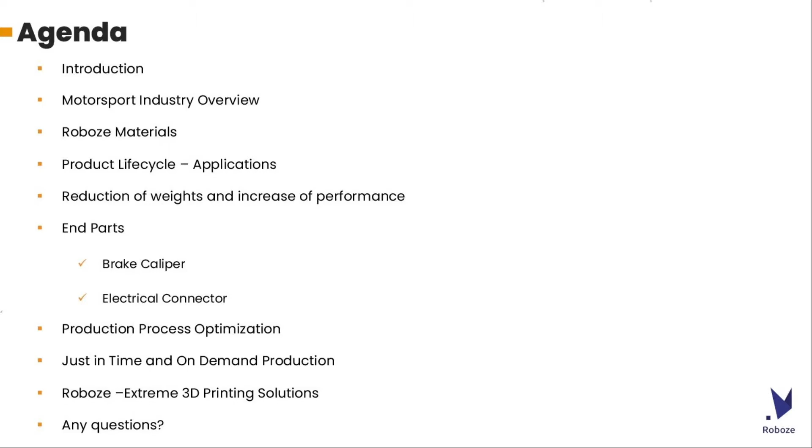Here is Davide, and the main topic is 3D printing for the motorsport industry. After a brief introduction, we will take a look at the most interesting superpolymers and composite materials for the motorsport sector, checking out the advantages that have been already offered by Roboze 3D printing solutions in some real applications.

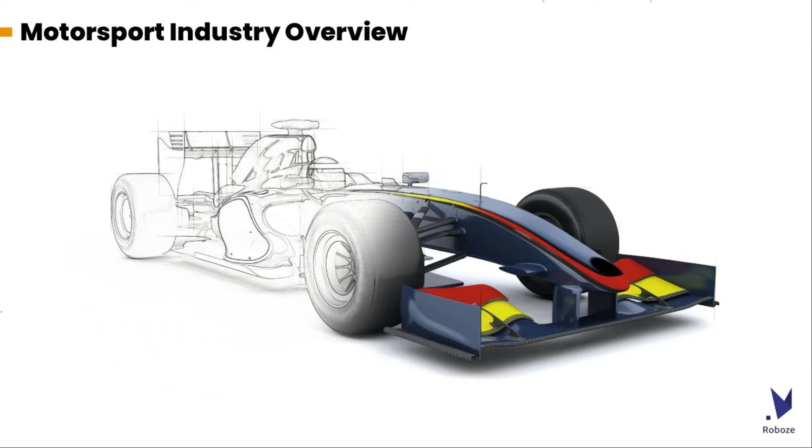And this search for innovation has brought motorsport closer to the latest additive manufacturing technologies, which are able to provide new solutions to the main challenges faced by this industry. How? First of all, design freedom. While traditional manufacturing techniques remove material from a solid block, 3D printing involves the deposition of material layer by layer until the final part is obtained.

This process enables an incredible design freedom, resulting in printed parts with extremely complex shapes or internal infills that may vary in pattern and density. This means that the material can be placed only where it is needed, creating lightweight and strong models that may push the topology optimization concept beyond any boundary.

For sure, in such an industry where solid assemblies and aerodynamic studies have a key role, mechanics requires a surgical precision, whether it is for production or research purposes. And for this reason, additive manufacturing must go through the control of the whole printing process in order to ensure the accuracy and repeatability needed for rapid validation of motorsport parts.

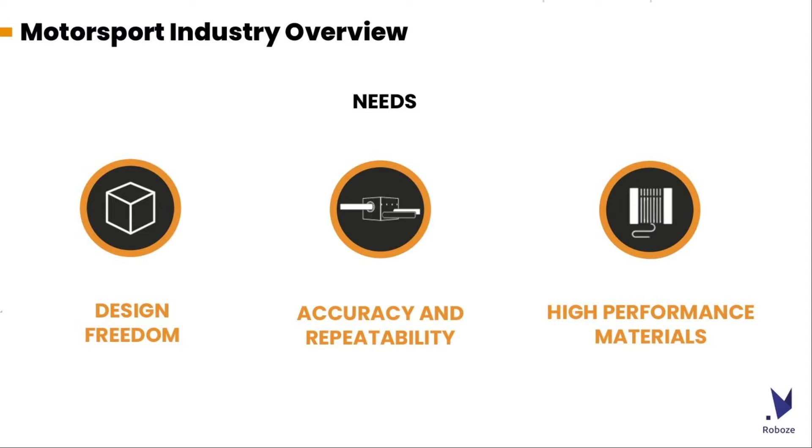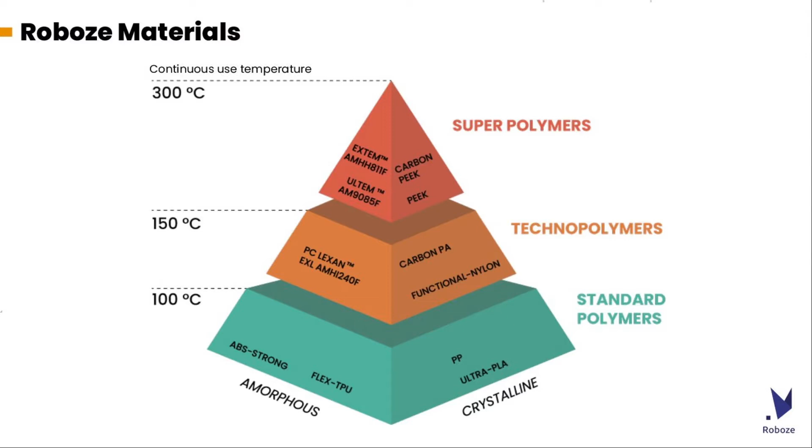Roboze carbon PA is a composite material based on a polyamide 6 matrix reinforced with carbon fiber at 20% in weight. The reinforcement enhances the main properties of nylon, such as resistance to abrasion and wear, providing it with greater thermal and mechanical resistances. For this reason, the filament can work up to 180 degrees Celsius, while from the mechanical point of view, it shows a tensile strength of almost 140 megapascal and an elastic modulus of 15 gigapascal, which is much higher than most other composites available for FFF 3D printing solutions.

The good surface finish, the excellent strength-to-weight ratio, and the possibility of post-machining make carbon PA one of the most used materials in the motorsport sector for the production of finished parts, such as levers and pedals, chain stabilizers, and air deflectors.

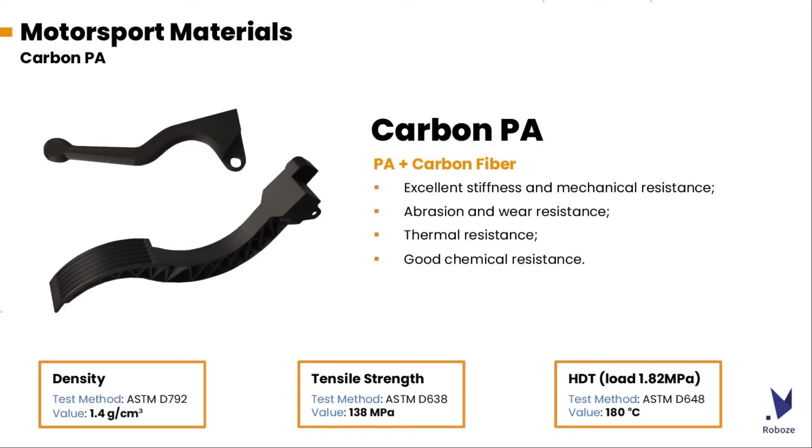PEEK is a semi-crystalline polymer capable of combining good mechanical properties with excellent chemical and wear resistances over an extremely wide temperature range. It has been certified as a self-extinguishing and flame smoke toxicity compliant material, which is often required for racing. PEEK's molecular nature allows it to maintain creep, fatigue, and wear resistances even at temperatures that are close to 250 degrees Celsius, making it optimal for those applications that require reciprocal sliding parts.

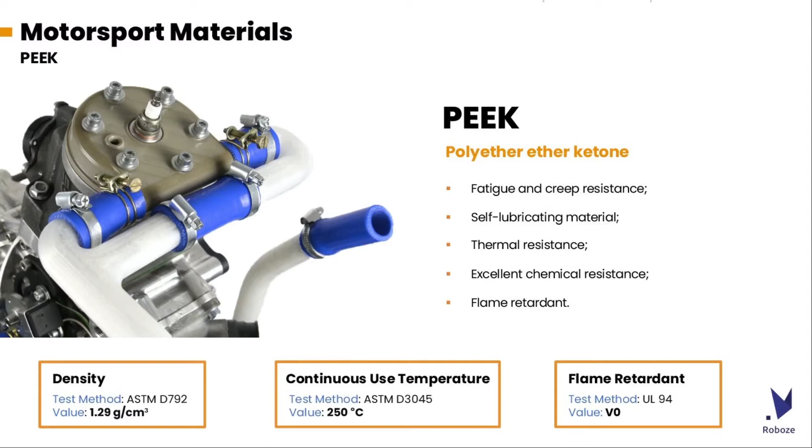By the same token, most acids, bases, and organic solvents do not affect this superpolymer at all at high temperatures. So the ability to work in chemically and thermally aggressive environments, along with the good dielectric and insulating properties, make the motorsport industry use PEEK for the production of electrical connectors and elements which are in contact with oil and gasoline, such as the head or crankshaft covers.

As for nylon, the addition of 10% in weight of carbon fiber reinforcement into a PEEK matrix increases its mechanical and thermal properties, enabling metal replacement in some of the most extreme applications. So, chemical and tribological characteristics are quite the same as the unfilled polymer, but the elastic modulus and the heat deflection temperature are respectively boosted up to 14 gigapascal and 280 degrees Celsius, with better dimensional stability and an amazingly low coefficient of linear thermal expansion.

For these reasons, carbon PEEK provides an optimal solution for the motorsport sector, which takes advantage of the high strength-to-weight ratio to produce seals, tools, and finished parts such as heat shields, intercooler inlets, or shafts and hubs.

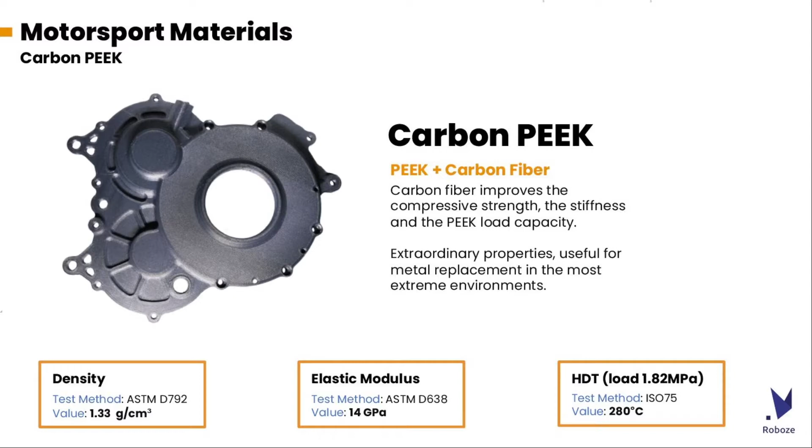Now, people working in motorsport know that the workload rarely drops to quiet routine levels. To provide a rapid response to the different needs of this industry, additive manufacturing technology can be integrated into the entire product life cycle, from design to support, in order to reduce related times and costs.

As previously stated, from a design point of view, 3D printing may play a key role by enabling the production of geometrically complex models, reducing the need for assemblies, and integrating new functionalities within the parts. Moreover, when multiple design-production-test iterations are required, the 3D printing of superpolymers and composites can accelerate both the prototyping and production phases.

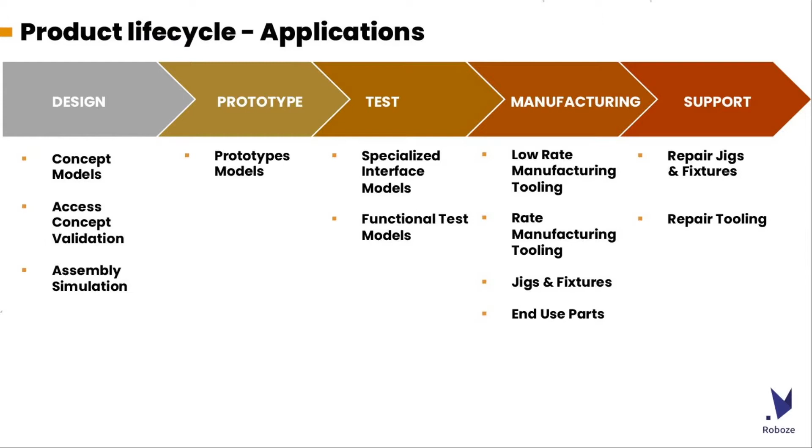In the same way, additive manufacturing can be used for the realization of tools, jigs, and fixtures for assembly and quality control of traditionally manufactured parts, promoting the digitization of the warehouse or standardizing and speeding up the production process.

Now, let's see some real applications, starting from a very simple but important concept. A racing car is a system that always runs close to its limits. And for this reason, weight plays a key role, as it is able to influence every single area and every single sector of the car, from performance to road handling, from the vehicle setup to its safety. For example, a heavier car will necessarily have longer braking distances, worse handling, a more critical acceleration phase coming out of a curve, and so on.

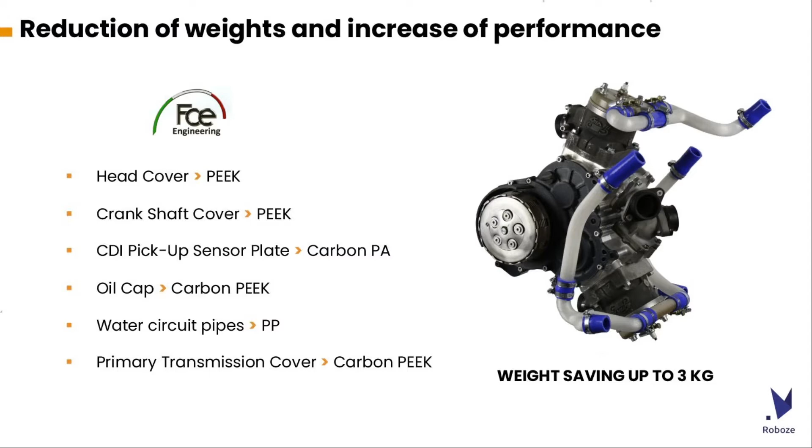As said before, when you match the design freedom provided by 3D printing with superpolymers and composite materials, you can obtain lightweight and resistant parts, which are able to greatly reduce the overall weight of the vehicle while keeping it safe. With particular attention to the design phase, FCE Engineering has taken advantage of the metal replacement opportunity offered by Roboze, reducing the weight of a perfectly operative 250 GP engine by about 3 kilograms with respect to the original design that was mainly made out of metal.

Different application, same goal. Here we have a study from the ITS Maker Institute of Fornovo, where the structure of a high-performance automotive brake caliper has been completely redesigned to be made in carbon PEEK using Roboze FFF 3D printing solutions. The braking system slows the vehicle down by converting movement into heat. This is done by applying pressure to the rear side of the pistons, which push the brake pads against the rotor disc. And the part that is mainly involved in supporting the clamping force is the caliper body, which has to be light, stiff, and must withstand operating temperatures ranging from 150 to 200 degrees.

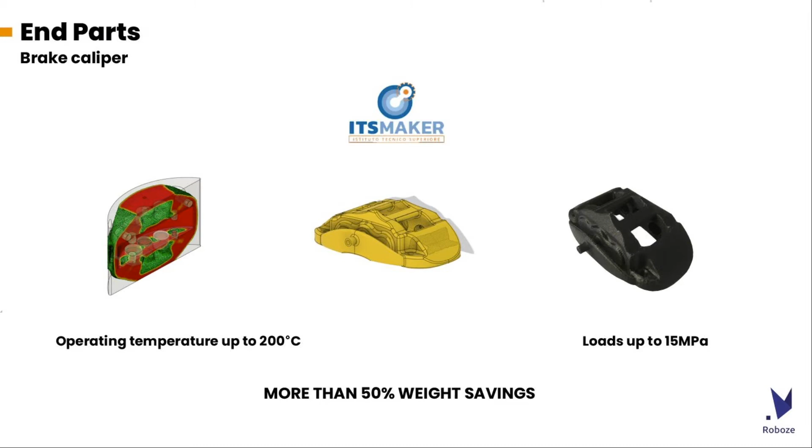The caliper body is usually made of die-cast aluminum, and its CNC machining can last more than 10 hours for a final weight that is generally between 5 and 7 kilograms. By applying some topology optimization and design for additive manufacturing concepts, along with thermomechanical simulations for sure, the caliper body has been printed in one single step with a total weight lower than 2 kilograms. So if you're interested in this study, the printed part will be tested soon, so stay tuned.

Then we can jump to a PEEK electrical connector we printed for one of the major world players in the automotive sector. As for automotive, among the trends you can observe in the motorsport industry, there is the electrification of the vehicle. Just think about Formula E, an FIA car series born in 2014, which is completely dedicated to electric cars. From this point of view, among the various solutions proposed by additive manufacturing technology, there is the possibility to realize protective cases and connectors with superpolymers, just like PEEK, which guarantee appropriate electrical insulation even in challenging environments. This is particularly interesting when complex geometries and small production batches are required.

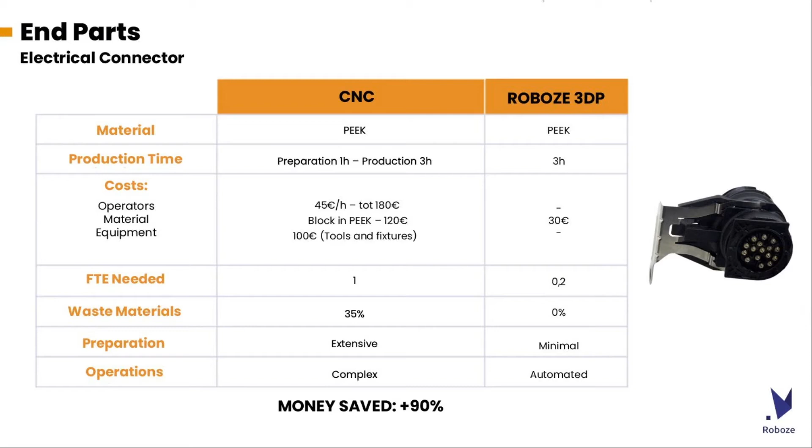And last but not the least, the carbon fiber lamination tools. You know that the flagship material of the racing division is the carbon fiber laminate, due to the combination of low density and excellent mechanical properties, such as stiffness and resistance to abrasion, fatigue, and impacts. Just consider that whole monocoque frames are usually made of sandwich panels with carbon fiber outer layers spaced by foams.

Now, the damages suffered by a vehicle during a race or the structural improvements made during the development of a new frame and so on may involve the realization of many single parts in a very short time. With an industry that moves so fast, traditional methods for the production of invar or steel molds may be too slow, since they are often related to high cost and times.